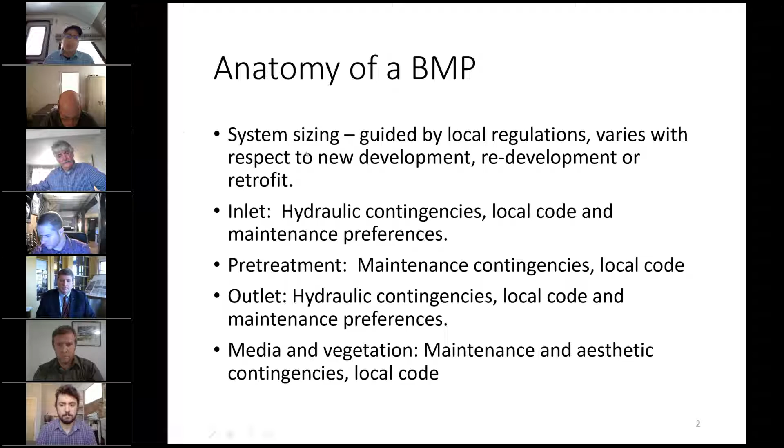So the in-between varies, and it's often flexible based on, I would say, either regulatory guidance or preferences of the owner operator, the long-term owner operator. And this is one of those areas that we hope continues to grow, because I think traditionally the preferences, particularly the maintenance preferences of the long-term owner operator, for the most part, have not been incorporated into a lot of design. And hopefully that's changing as we embrace maintenance and the need for maintenance.

So early on, every system that was designed had an operation and maintenance plan. Typically, it was 30 or more pages. And my guess is that no one or very few people outside of the primary authors of that document ever read it or interacted with it. And so that has been changing over time. What you have here is two examples of some of our checklists. One of our early checklists, we reduced those 30 pages to 1 page and 4 primary items.

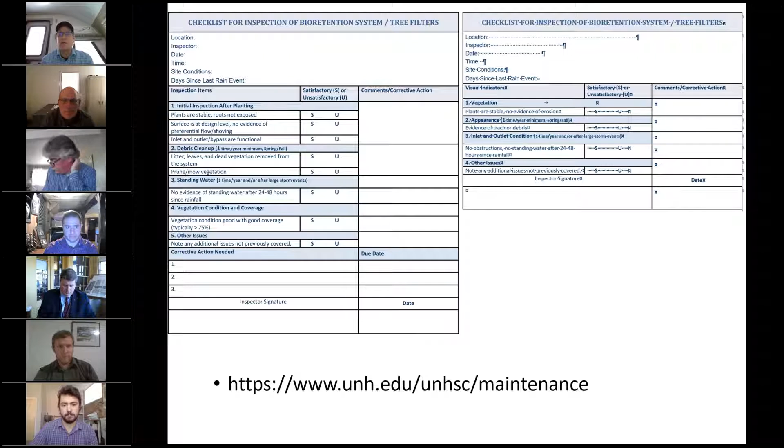And through work that we did with Warwick, we tried to reduce that even further, so that you can see on the right. And really, we're looking at visual indicators for the most part. Can water get in? Can water get out? Is there any evidence in the in-between that there's some type of problem? And so for those who routinely do maintenance, this level of oversight can be minimal. A trained eye can validate and verify this relatively quickly. And so hopefully that's where we're moving towards over time.

When we look at maintenance, the actual function can be broken down, I guess, into some categories. There hasn't been a ton of literature on green infrastructure maintenance. This is something we presented in a paper that was published in 2013. Unfortunately, that's still very relevant today, at least some of the guidance and the background. So we use these types of categories to portray the types of maintenance that we're anticipating and the prospective cost that might be associated. So something minimal or simple would be mowing the lawn, very routine operations that don't require engineering, all the way up to complicated.

Now, these go into greater detail when we look at the types of maintenance cycles that are out there. And here we're seeing maintenance cycles in a decreasing order of cost, but I think it's also in the order of what we generally see out there. So for the most part, reactive maintenance cycles dominate the industry. And what I mean by a reactive maintenance cycle is, in general, you're ignoring the systems until there's evidence of a problem. And when there's evidence of a problem, it's probably well past the need for maintenance. And this we would categorize as probably the most expensive. So in the short term, it's very cheap. In the long term, it's not as effective for water quality and performance. And if your system fails, then you're engaging more skilled and more engineered approaches to fixing and repairing that.

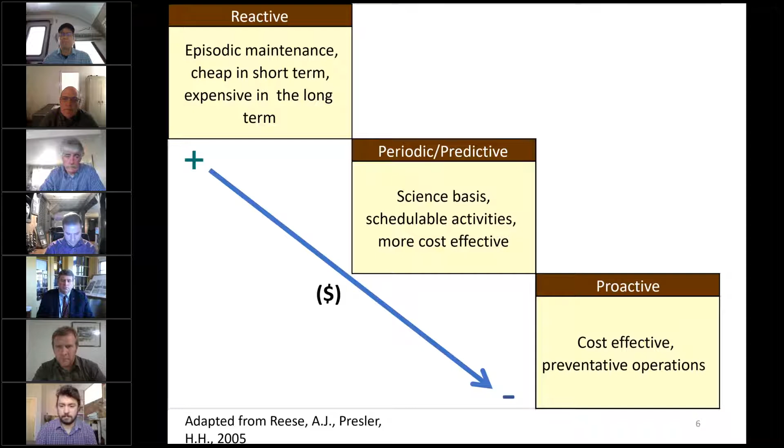Then down to predictive or periodic. Our feeling is that within 3 years of operation, and some of the later speakers hopefully will validate this, within 3 years of most systems, you get a sense of the full range, the universe of approaches that you're going to have to implement or schedule in order to maintain these systems. Then to proactive, and this would be more around structures that might be underground and might not be as visually easy to inspect, but you would be doing some proactive things to ensure that there's no failure, like inspections and maybe sweeping or cleaning. So just some general ideas of what those activities are.

Periodic predictive would be, you're going to have to remove solids, particularly from the pretreatment area. That pretreatment area should be designed so that you have easy and frequent access to it, and you're removing the coarse materials more frequently than maintenance activities within the system itself. Inspection, mowing, or vegetation pruning or removal. Proactive would be like street cleaning, a very proactive source control that can limit the amount of debris available for mobilization into your system.

Erosion and sediment control, routine seeding and revegetation in areas that maybe look like they're struggling.

And when you look at costs, we developed some idea of costs based on the level of complexity. And again, the idea here, if you have cost on the vertical axis, and then these are the various systems on the horizontal axis, from ponds, retention ponds, detention ponds, swales. These are more conventional style systems, to now getting into the green infrastructure.

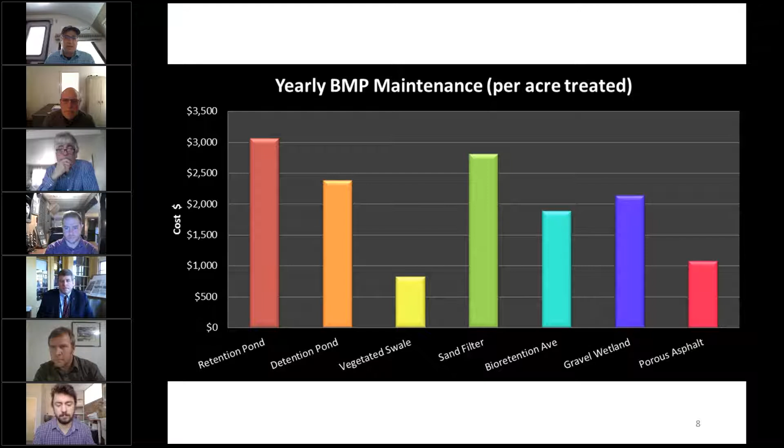What we see is, provided the pill we have to swallow here is that we're doing maintenance. And so if you're not doing maintenance, obviously you can't compare those costs to anything else. But if you are doing maintenance, a lot of times some of these conventional systems are on a scale or in some cases higher in annual cost than green infrastructure. That said, it's likely that the maintenance activities are different. So it's something we have to consider as we move towards green stormwater infrastructure for water quality.

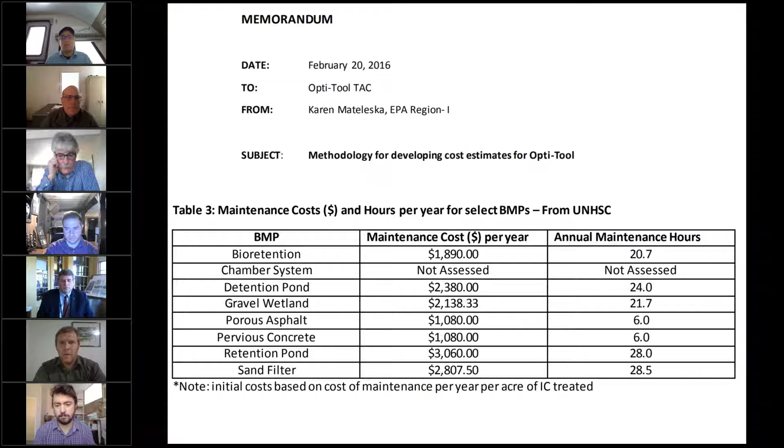Now, I don't generally like cost because they're always subjective. And so what we've done is, in this 2016 memo that EPA Region 1 has released, we actually have predictions of maintenance and annual maintenance expenditure in hours. So there are ways to assess the man hours or person hours that you'll be dedicating to these potential systems over time.

We say, we want the cheapest system. But if we're considering maintenance, then we need to consider that long-term maintenance cycle. And if you're looking at things like ponds that might be relatively cheap from a capital cost, but incur larger annual maintenance expenditures, if in 5.4 years my cumulative maintenance costs now equal my capital costs of the system, then by the anticipated life cycle, I will have paid for the system 4 or 5 times over with respect to the maintenance burden that it initiates.

So it's something to consider, especially as we move into this direction and you're the owner operator and someone's presenting something for your facility that you're going to own and operate for 20 years or more. You want to be cognizant of what these costs and these associated labor hours entail for your organization.

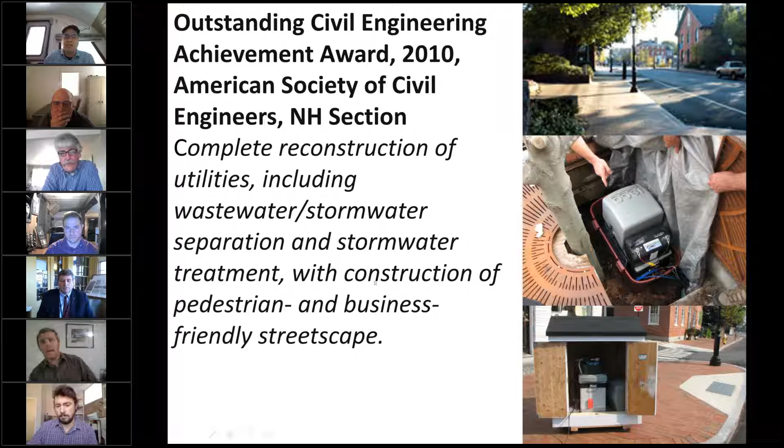And we were invited back 8 years later to do monitoring. We had done some initial monitoring that showed that these biofilters and tree filters that we had installed, at least within the first year, were doing great. It was lining up with all our anticipated performance expectations, and then we left, and 8 years later we were invited back to test it to see how it was performing.

And so what we did is we separated it into 2 sub-watersheds. Our control watershed was untreated, so straight out catch basin, curb, gutter, catch basin, outfall. That was our control, and then our green stormwater design was that award-winning treatment that had 4 or 5 different tree filters, sand filters, bioretention, and the like.

What we see basically is when we compared the green infrastructure, an award-winning site, to the unmanaged site, what we see is really the legacy of maintenance, or more in particular, the legacy of lack of maintenance. And so we see within 8 years, no statistical difference in the water quality from the drainage area.

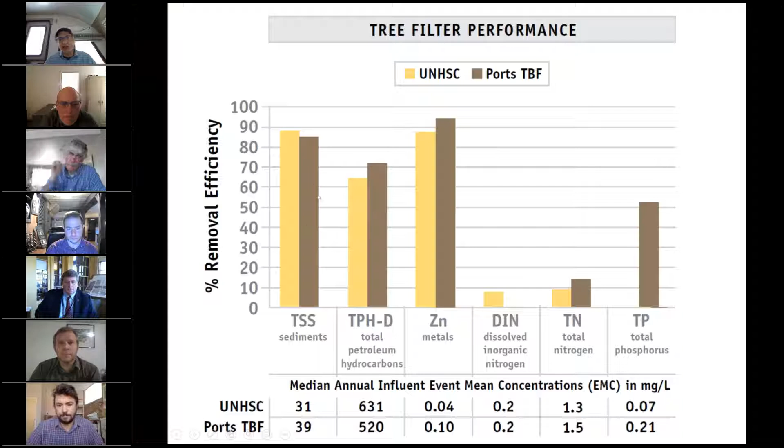And so that was really compelling, and I really think it underscores the need and, quite honestly, the importance of maintenance, even more so over type of system. So if you can ensure that you're going to maintain that system, I think that takes priority over the style of system that you're installing.

So was this predictable? I would say at this point, yes, because we never discussed this with the long-term owner operators. We never asked them, one, if this is something that they would envision maintaining, or that they even had tools to maintain. And it turns out they had neither. And so hopefully, like I said in the beginning, this is something that is starting to turn around. We're involving the long-term owners and operators in the design process, such that we can ensure the sustainability of our investments.

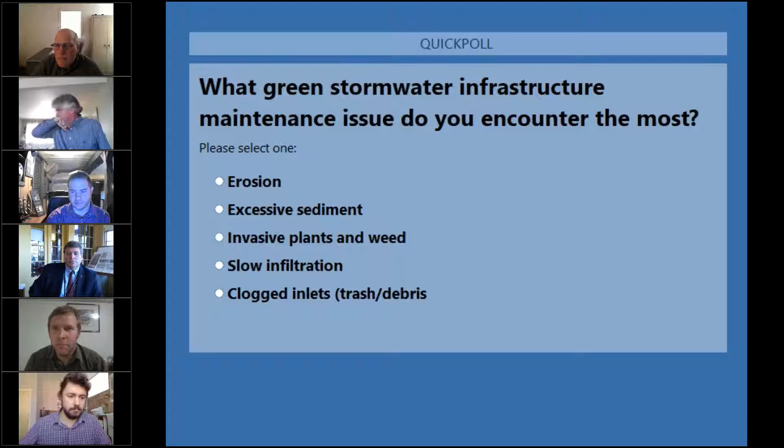Okay, yeah, so it looks like same as what I think we encounter a lot is clogged inlets, weeds, sediment. They're probably all an issue, but yeah, these polls are important to help us develop content for future trainings. So I do have a couple of questions here in the chat.

This first one says, Jamie, do you have another similar study that compares a system that is well maintained versus a system that is not? I think you're on mute, Jamie. Unfortunately, I don't. I mean, we have studies on maintenance.

This particular study that I just showed you was the first time we ever really looked at the legacy of a maintenance program. And, you know, I would love to do more comparative assessments like that, because lost in here are the exact technical details of how these systems fail and when they fail. And so those are really legitimate questions that unfortunately we can't answer.

Okay. Got one more here. It says, is there any sort of real-time monitoring work being done, some sort of an alert system that would be accessible via the web to find out if systems were functioning properly? I'm assuming so that would trigger you to send out maintenance people.

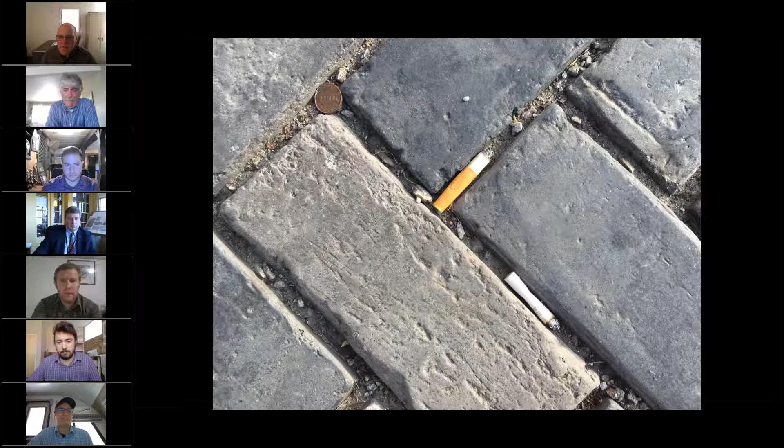So what has turned out to be an absolute bane of our existence is cigarettes. No one saw this going in. It's a little bit like they took a cigarette out and said, gee, what space should I have these apart? Well, let's just use this as a spacing. And so just about every single complaint we've got about this green infrastructure on Broadway has to do with the massive numbers of cigarettes. And those suckers really do not want to come out. We've tried just about everything.

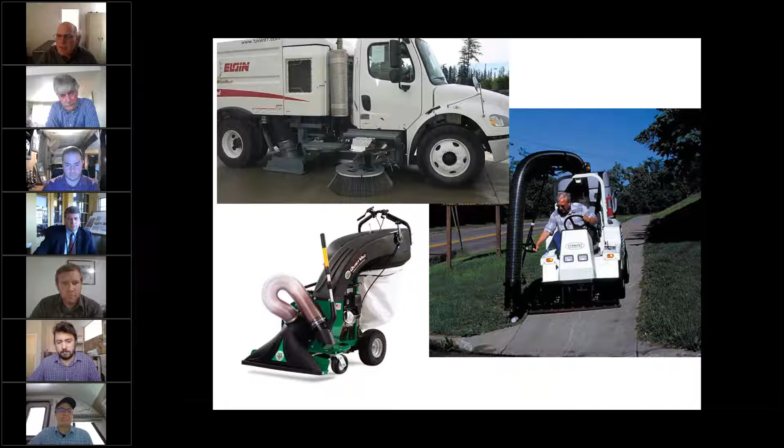Steve Reese is going to talk in more detail about the maintenance of permeable pavers a little later on, but just to say it's frustrating. The picture that's missing is the flamethrower I wanted to try.

The next step is these permeable pavers lead into these tree wells, and these systems also, like the permeable pavers, have worked out incredibly well. But what wasn't anticipated, all of this decorative Boston Garden post and chain was not part of the original design. Within half an hour of this structure being open to the public, I had calls from the city manager's and mayor's office about the potential risk of people falling into this. There was absolutely nothing preventing pedestrians from falling into these, in a sense, bear traps. So I was out there within a half an hour with 2x4s, making a makeshift enclosure.

So it's functioned in many ways quite well. There is a continuation of having to keep litter and trash out of this system. But when we have a heavy rainfall, too heavy to be absorbed by the pavers, the overflow comes in here. So you'll notice that there's no green in this, and that's because what wasn't anticipated in the design is the infiltration is so fast that everything that was planted in there literally floated up and completely came out. And after about 4 or 5 times of trying to replant these floated-up plugs, we gave up.

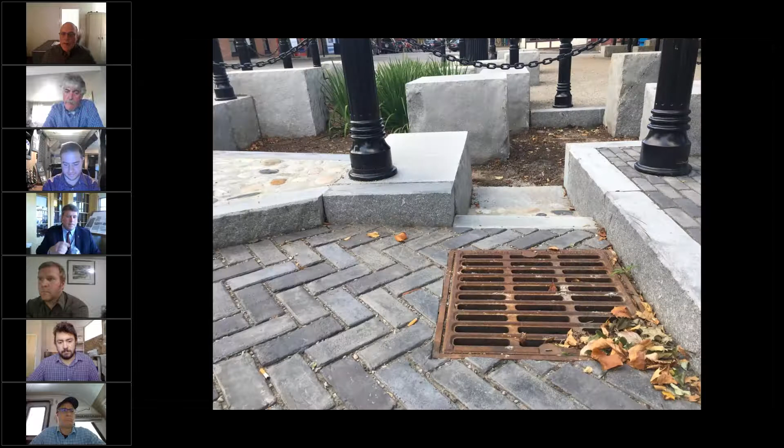But one of the things I would really recommend when you're doing green infrastructure in an urban area is you better do your site investigation up front. You better find out what's underground, because this catch basin inlet was not supposed to be in this location. It was supposed to be about 2 feet to the left, right in this area here. And the intent was once the rain garden fills up, any excessive water that isn't drained would come back and be caught up by that catch basin.

Unfortunately, I think you could grow cactus in this catch basin. We're going to have to come up with a solution, because after about a year, that's all of the sedimentation we've had, because the majority of the water is caught by that drain. We're going to be experimenting with a mat or something else to try to get more water into this system.

So we also have some other similar system just next door. This one is totally only fed by rain and a little bit of sidewalk runoff. So again, you should look up when you're designing these systems, because this very expensive system falls directly under the rain shadow of these huge trees. So they won't last forever, but certainly these are the type of considerations when you're trying to put green infrastructure into a dense urban area.

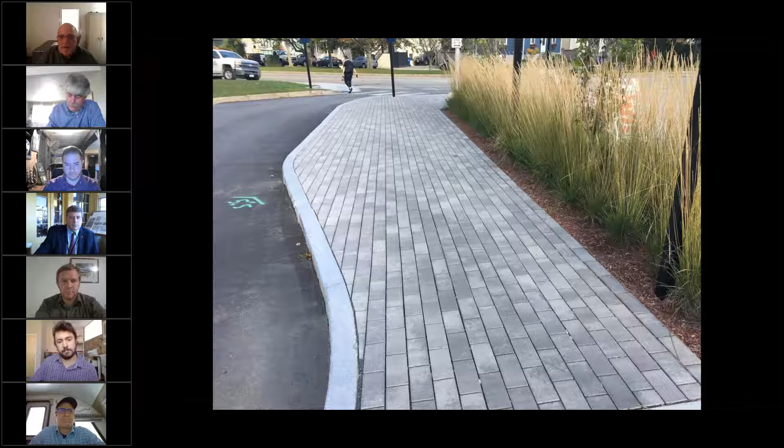So I think it's a success story. When our visitor center bus parking area was being redesigned, we had a demand from the public to go back to the drawing board and include green infrastructure. So the design for our transportation and visitor center completely changed. And we have an extensive system of green infrastructure. And we also have pavers there. I think in this case, they're a little bit closer together, but still my nemesis, cigarette butts.

But this green infrastructure system is really a great place to study, because it involves such a range of different systems. In this lower corner, you can see this sort of black cover. That's actually the inlet. And this system is completely fed by piping underground from the adjacent structure's rain gutters. As far as a point of failure, ensuring that those gutters and drains are properly maintained is going to be essential, and is certainly going to be one of those challenges.

A much simpler design, one that I like, is to simply have a break in the curb, so that automatically drains into it. What I would counsel is that engineers love riprap, and they love nice big stone that it's impossible to run lawnmowers over. Oftentimes this riprap clogs up very easily, blocking infiltration, and in some cases it actually provides a perfect place for invasive plants to get established.

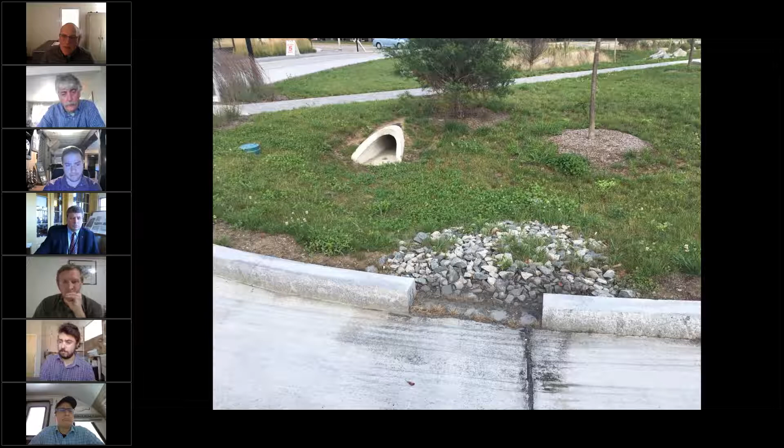So we've been experimenting with smaller and smaller stone. We found about 2-inch stone, about the size they would use for railroad grading, lies flat, and leaves flow over it. It handles all of the erosion, but doesn't create material that can catch leaves or harbor invasive plants. A great innovative design is simply to have a grate over the sidewalk.

And this area, I guess Jamie would call a pre-treatment area. Jamie was kind enough to do a training for myself and all of my staff on how to maintain this system, and we did it actually before it was done. And so we discovered that this whole pre-treatment area was basically a standing pond. After a little investigation, it turned out that for the stone between the treatment area and the infiltration area, they decided to put black plastic under the stone. So it was an easy fix, and it worked out really well to have Jamie there. Although the contractor wasn't loved, the checklist was pretty accurate for the project.

And if you look just to the side of the photo, this is really my favorite way to infiltrate. Basically the whole back of the bus parking lot is simply sloped in such a way with no curb. It just runs directly off the sidewalk into this long pre-treatment area, and then flows into the infiltration area, which you can see is vegetated.

So I want to talk a little bit about vegetation. Jake Gorky is going to talk a lot about planted versus seeded. This system, as designed, was incredibly elaborate. It called for 10,000 perennial plugs. You can see a little line of gravel and stones that run throughout this. And this was all supposed to be a perennial garden. I pointed out to the visitor center that was going to maintain this system, how are they going to weed 10,000 plugs? And I was able to convince them to change it to a seeded area.

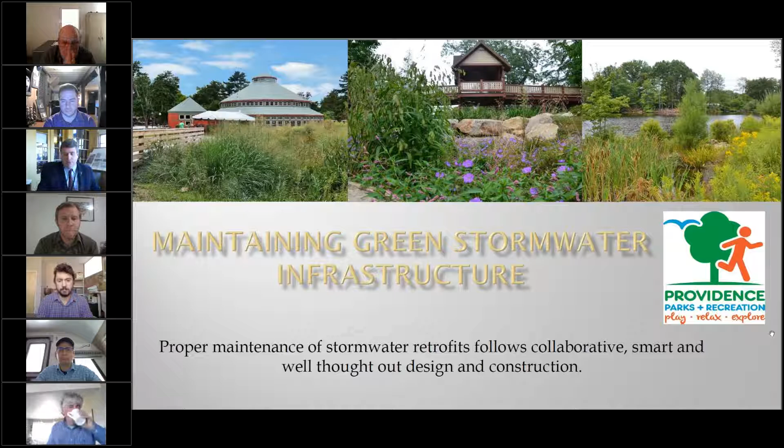And so through a consent agreement with Rhode Island DEM, we embarked on building 40 plus stormwater BMPs in our park, and then tried to guide the design based on what our maintenance personnel and the engineers were telling us. So we own everything from the design to construction to maintenance of these facilities. So we have it all. And what we found is that proper stormwater retrofits follow collaborative, smart, and well thought out design and construction. And that leads to easy maintenance. So maintenance is a function, and aesthetics are connected to that function.

You need to know your capabilities of your maintenance staff, the equipment that they have, a bunch of different things that lead to their ability and success in maintaining these things. So like Jamie talked about, there's 4 main elements to any BMP. It's an inlet, a pretreatment or sediment removal, the weirs, and then the contaminant removal.

And we are, like Jamie, changing our nomenclature. Inlet doesn't really tell what it is. So we're going to call it a collector or something like that. And we're working on that now. And we're working with many of our consultants still.

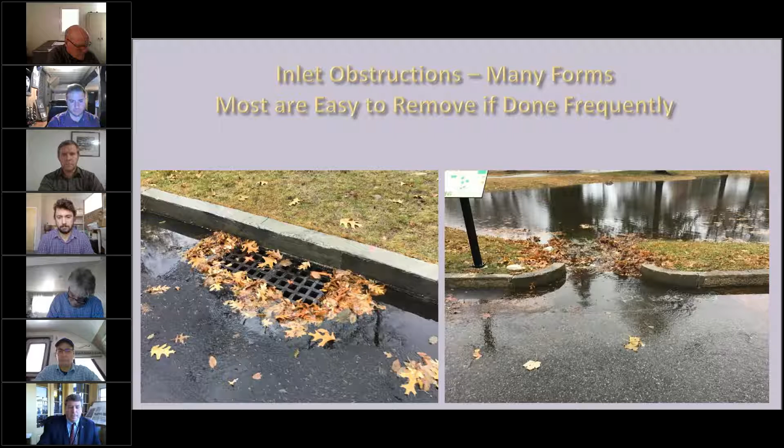And when you deal with your engineers and you're getting into designing these things, there's 2 schools of thought on that. One, put all the water through your BMP and let the overflow in the BMP take what you can't treat out. And then those that say don't put enough water to inundate that structure, let the street serve as the overflow. So we've been dealing quite a bit with that, and we have different versions of it.

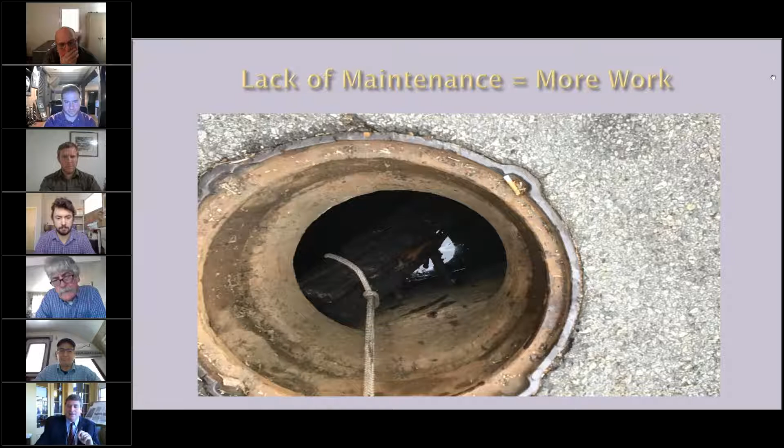Lack of maintenance always leads to more work. So this, believe it or not, is a 24-inch manhole in an AutoZone parking lot here in Providence. And what you're looking at is a 10 by 10 timber that's about 10 feet long. So we asked our forestry department to come over and help us get the railroad tie out of the drain manhole, because we didn't know how to take a 10-foot long post and get it out of a 24-inch round hole. And this is about 50 feet down from the inlet from Mashapaug Pond. So as you see, they have a chainsaw on the end of a pole. We cut it, we put a rope on it, and that's what came out.

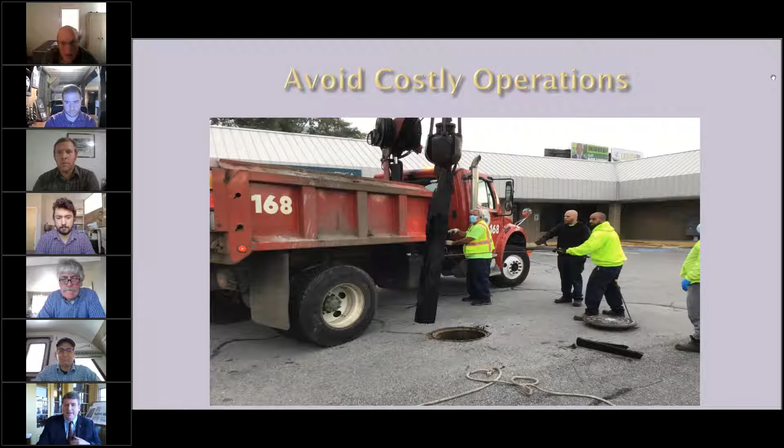This was a costly operation. DPW was involved with their claw truck. My crews, it took us about 3 hours to do this. That is certainly easily avoidable by maintaining the trash grate on the inlet coming out of Mashapaug Pond.

And here we go. So the pre-treatment or the sediment removal. There is a vulgarity in the Providence Parks Department, and it is river rock. Early on, actually, I've been with the Parks Department for 6 years. Before that, I was a contractor for 30 years.

So if you can imagine what it takes to remove the sediment from this 18 inches of river rock, it's a very successful design in removing sediment. It removes it tremendously. But you don't see it until a foot or more of sediment has built up in it. So I brought my crews out here. They were new to me. I was new to them.

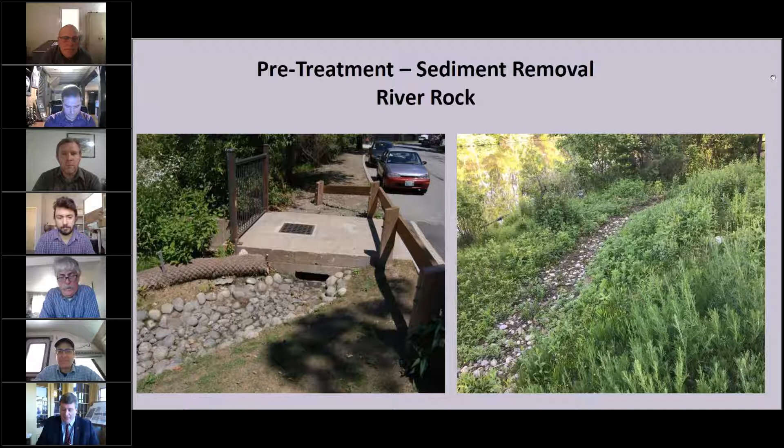So we leave this in place as a training tool only, but we will never use river rock in this sense ever again. If it's a small section right off a scupper off a roadway, that's easy to maintain. This is about 300 feet long, and it is a bear for us to maintain. So river rock is not something we use.

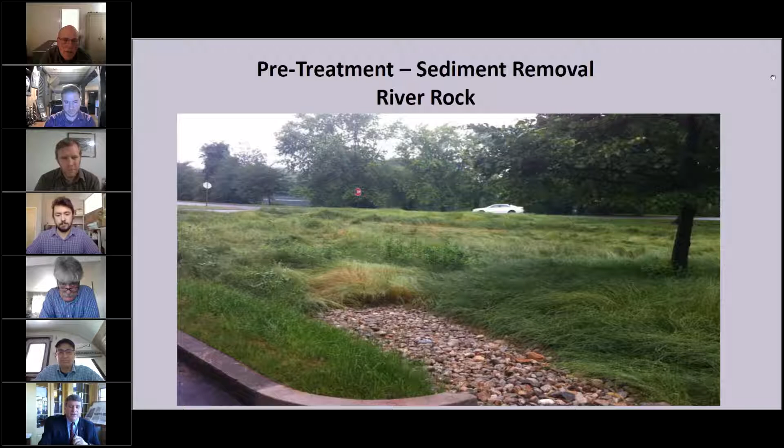But again, when you look at it, it's beautiful. So this is one of those areas where we will use it. It's very small. We can take care of it. It's in a highly visible area of the park. This is a sand filter, and this is the inlet. So very effective in sediment removal, very difficult to maintain.

And for lack of a better term, my crews utilize a drive-by sediment removal technique. They drive by, do not need to leave the seat of their truck to see if sediment has started to accumulate in these areas. So I think Steve Ritchie's going to talk later in the program about maintaining permeable pavers. I would suggest that what Steve's going to talk to you about are much larger permeable paver areas that have high vehicular and pedestrian traffic.

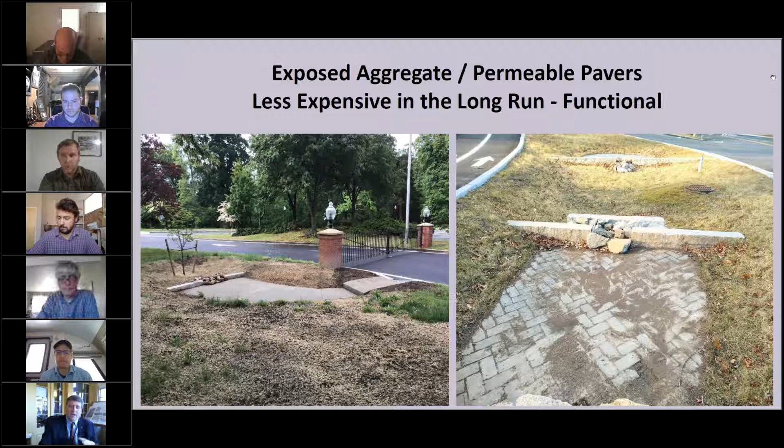And as Jamie mentioned before, every situation is different. So I'm not going to say to you that you're going to realize those same dollar amounts, but that's what we did in one area. And it's based on how much sediment goes there, what's contaminating it. So it's difficult. The bottom line is, if these things are functioning, we're getting clean water.

The next part, as we move past the sediment removal, is the weir. So we want your water that is laden with sediment to come in and then stop. That motion allows the sediment to drop out. Traditionally, you've seen pressure treated weirs, you've seen granite weirs, you've seen granite curbs, which we use all the time. But we kind of thought to ourselves, where our aesthetics are important to us here in this small 435 acre park, well, what about boulders? What about just putting a line of mortared boulders in?

So we've looked at a bunch of different types of materials we can use. On the left-hand side, it's the boulders. On the right-hand side, we used a gabion basket. So I know Groundwork RI uses a subsurface gabion basket. We use this gabion basket above the surface at the base of a permeable paver, as you can see it. But you can see what happened for a dramatic storm where we had some erosion. That gabion basket got the sediment built up, and now we had to have a difficult cleaning of that thing. So we're learning these lessons. We're hoping to pass these lessons on to everybody else. But you have a lot of options.

These are weirs here in Roger Williams Park. We incorporated art into some of them, so it's not just a granite curb. We also made a natural looking stream with one of our weirs. We used a pump out of a place called the Japanese Garden. We pumped the water up into a subsurface drainage system, and then we let it come down and make its way back to the pond through a granite weir and some boulder rocks. So it's very beautiful, high area for photography. Brides will go out there and see it. This is an early on picture. It's fully vegetated now. But don't be afraid to incorporate a bunch of other things into stormwater. I mean, art is a great thing to add to stormwater.

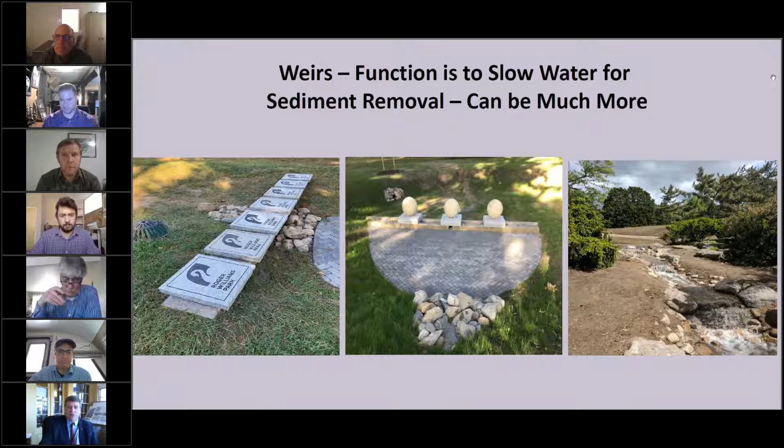So maintenance challenges that we've faced. Did you lose me there for a minute? Yeah, your audio is cutting out just a little bit. Okay, you got me back again, Ryan? Yep, we got you.

Okay, maintenance challenges. Funding is always a problem for municipalities. We face that too. So we had to build 42 stormwater sites in Roger Williams Park to address our MS4 permit. So how are we going to maintain those? We felt that training our staff was the most economical and the only way that we could do it successfully, and that's what we did. But it's a huge task. We understand that taking catch basins offline is expensive, but it's important. We need clean water. So you can either do it in staff, or you can outsource it. Outsource is a check that needs to be written. That's oftentimes more difficult than labor hours spent.

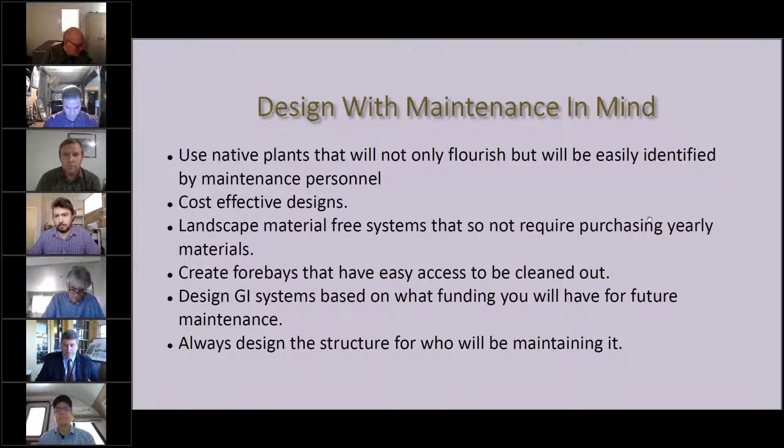Design for the funding you have. So, you know, the size of these structures is directly related to the cost. So if you can't treat all the water, treat as much as you can. Whether it's geography that's a problem or cost that's a problem, do what you can to get the biggest benefit. And always design the structure for who'll be maintaining it.

It's just extremely difficult. So the sediment removal, one of the easiest things is a large basin. So if you can capture it in an inlet out in the street, that's one way to do it. Watch the slopes. You need to have access to all areas, both sides of these things, because that's how the workers are going to remove it. In water access, now we've locked ourselves away from where some of this material ends up in the ponds because it's not 100% removing all the sediment. We can't get to it.

Know the capabilities of your equipment. There's specialized equipment to do this. It's expensive. So design for your staff and your machinery. Also the experience of your crews. We train all the time. We're always training our crews. And the experience of the crews and how they run their equipment is a direct result of the training that we've done.

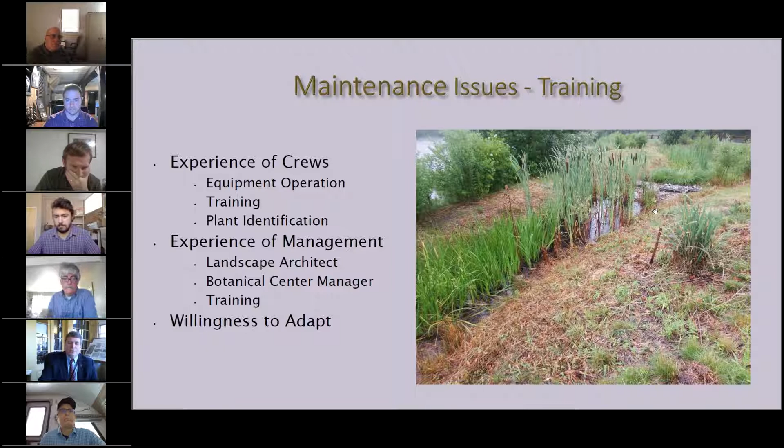And most difficult for a lot of our crew members is the plant ID. You know, they're not landscape architects, they're not horticulturalists, so it can be difficult if you didn't study that. So we use the best tools we can to make it easy for them. But we do have landscape architects on the payroll and a botanical center manager, and we ask them to do the training. And the crews have to be willing to adapt to this new thing. And luckily, we have a crew that's very willing to adapt.

And again, it always comes back to the money. So these types of elements are more expensive than your standard catch basin. So a buy-in from the administration of your town or whoever it is leads to cleaner water. It's labor intensive, it takes more staff, you need a commitment. And the Clean Water Act is in place here in Rhode Island, and we need to start abiding by it. And that's what most of this work has been about.

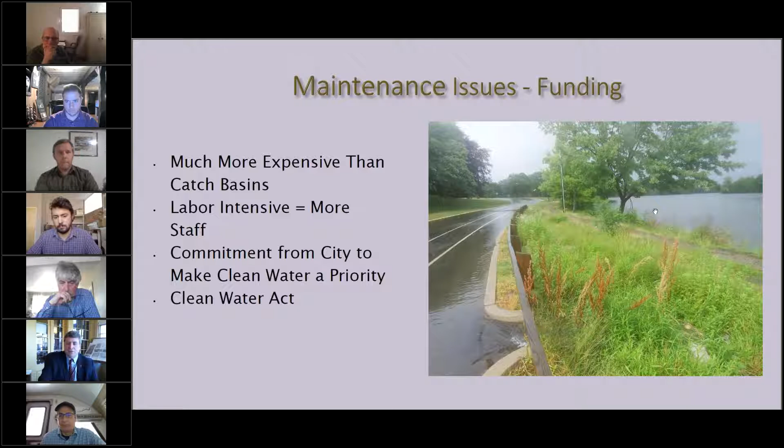So how do we do it? We use pictures rather than words. So this is one of our sites. This is what our crew looks at. And if there's time at the end of this presentation, we'll talk about a system that we have called Green Cities and Survey123 that allows our crews to do everything with an iPad. There is no more paperwork for us, and those reports get sent to myself and other directors.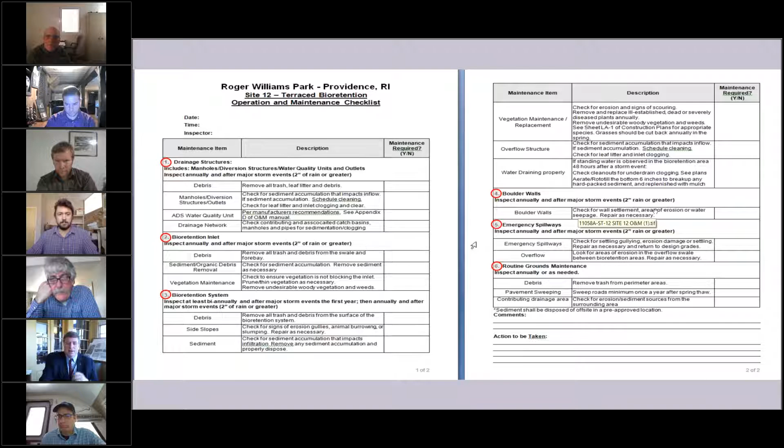So this just identifies what these different things are in these areas. And we did a search, like you had to find out where the weir was, you had to show us where the pre-treatment was, and it just tells you the basic maintenance that's required and the frequency of that maintenance. And they used to fill these out on paper, but now we all do this on the iPad.

So we talked about plants. So when we set out with the Stormwater Center to train people on what they should take out, we use this list.

What plants should not be in your stormwater center? Well, the palette of plants that shouldn't be there is huge. And these guys aren't going to learn everything they need to learn about that. So we moved away from what shouldn't be in, and we went to what could be in. What are beneficial native plants that you don't want to pull out because they're in there? That palette is huge too. So we reverted to what was planted there. We started with that, and now, because of the willingness of our crews, they've learned more about what can be in there.

The mistake that we made in our first training, which we've rectified, is we went out in early April. These are the pictures we had: everything was in bloom. Nothing was in bloom early April. So our guys turned to us and said, hey, we're done. None of these plants are here. So we've learned a lot of lessons.

For non-municipal private owners, if you're installing these things, do you have funding down the line to maintain them? You've got to have that in place before you build them, because otherwise they're not going to work. We've utilized volunteers here in the Parks Department to try and curb those costs. Are the property owners willing to do it themselves? Do they have to hire someone out?

We need to gain support from the community and the public to make sure this is a problem that everyone wants to address. Here in the park, we have the golf course mentality for a lot of our attendees. If the grass isn't cut, they think we're not doing our job. They think it's unkempt. And Scott mentioned it too. We have wildflowers that are adjacent to benches, and people call us and tell us, you got to cut that back because I'm sitting on the bench and this thing's hitting me in the back of the neck. They don't understand that it's wetlands.

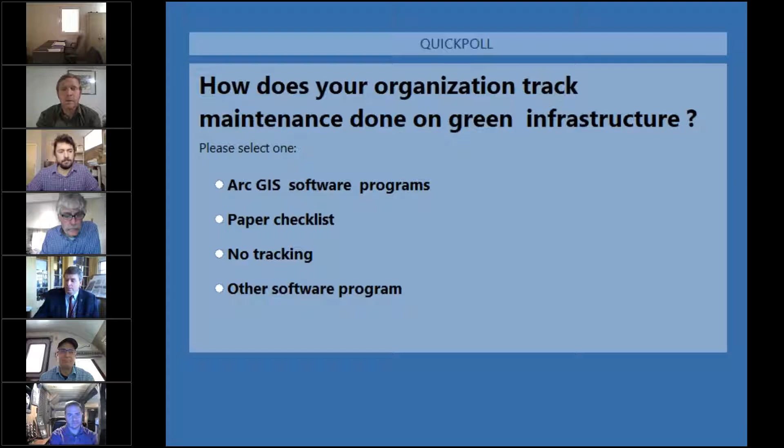Okay. All right, so it does look like not a lot of people are doing tracking. So hopefully we have time at the end, or even if you're able to stay a little later, Brian's gonna go over their tracking system. So stick around at the end of the presentation. So I'm going to get to some questions here.

One question is, at what point does it make sense to consider maintenance in-house versus contracting it out? So I didn't feel I had a choice. The other problem here in Rhode Island is there are no contractors that I'm aware of that are doing this specifically. You have that set of contractors that's willing to suck out catch basins, and they have that $200,000 piece of equipment. And then you have landscapers that may be more versed in pulling invasives and using that type of removal. But there's no contractors that are doing both.

And I think Rhode Island DOT and a lot of municipalities are struggling with a way to outsource that, because you don't have anybody right now that's doing that on a daily basis, particularly in like a highway scenario where a landscaping type company may not be used to working on a highway. They're not going to go out and do that type of work. So it's organizations like Groundwork RI and WRWC that are providing that work, and hopefully can expand their footprint and do a lot more than that out in the state. That's the situation here in Rhode Island.

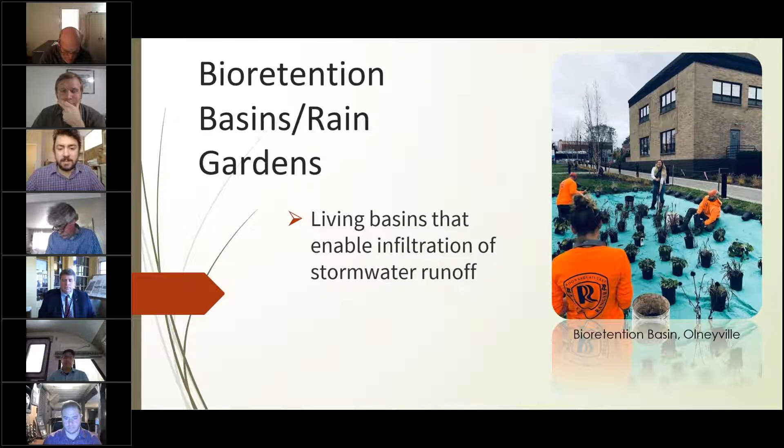Bioretention basin is basically a system that is used to collect and allow for the infiltration of rainwater off of parking lots, roadways, and areas that see large amounts of sheet flow. They consist of a soil media that is roughly 1 to 3 feet deep, depending on the size of your system. They tend to be one of the more effective ways at removing contaminants as well, based on the amount of biomass that you can fit in there and the amount of soil media.

So this bioretention basin here that you see is at Citizens Bank in Olneyville. We actually installed 2 of them, and they're kind of a great little example of how we may want to address seeded versus planted systems, what may be the better option for any given area. Sorry, here we go. First, I'm just gonna talk about the maintenance procedures and then we'll get into that.

So we wanna make sure that every time we go by these sites that we're looking for trash or any sort of debris that may have accumulated within the system itself. We wanna make sure that the system bypass or the overflow pipe is open and water can actually flow out of the system if it does reach that maximum pooling height.

Anything in there that might clog the system, again, we just want to make sure we get out of there. We want to monitor for any erosion issues that might occur within the system, so channeling, tunneling, and this especially goes for newly installed systems, because the plants have not necessarily had the adequate amount of time to establish yet or germinate. So those can be repaired simply by either adding river rock to the problem area, or if we want to add seeds to any of those erosion problem areas, we can go ahead and do that and then overlay it with an erosion mat or erosion fiber mat that will help further protect it.

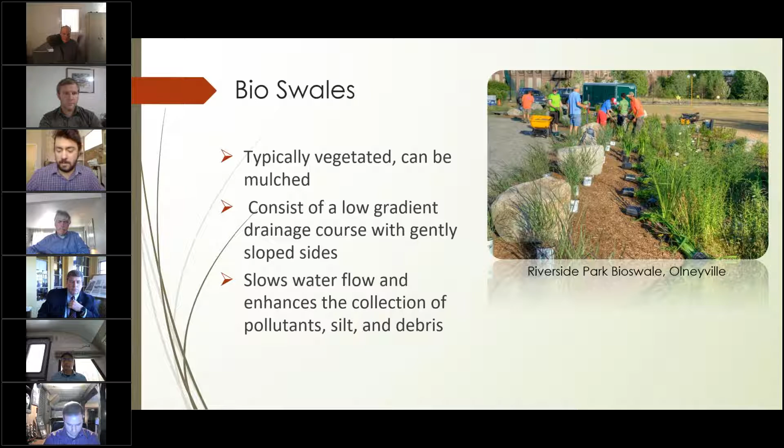When you have open areas that are mulched, you have to be able to have a maintenance staff that can tackle invasive problems. Any open soil or any open mulched areas that we have, we do tend to have problems with plants like mugwort, Japanese knotweed, among others, that we have to consistently be fighting with.

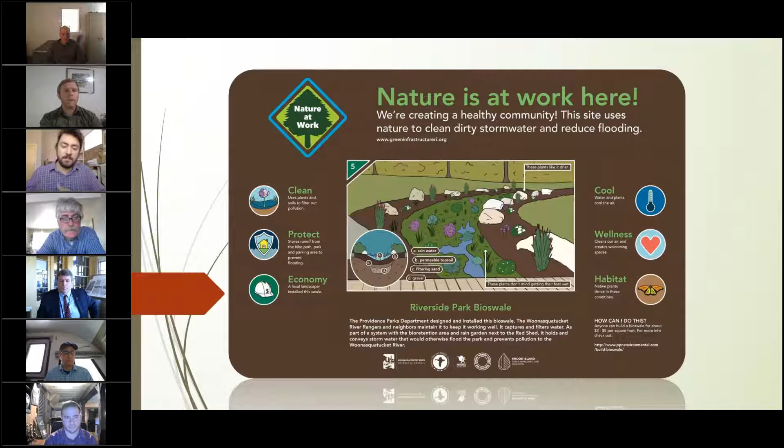Here's just a little sign that we like to put up. We have a number of these signs of various configurations for each one of our stormwater management systems that kind of tells the public exactly what's going on. We have them written in English and Spanish. We try to make sure that everyone knows exactly what these systems are doing, so that they're actually cared for well by the public and people appreciate what we do.

Again, this is bioswale maintenance, regular removal of trash or inorganic matter. That's something that you want to take care of. Basically make sure that your system is operating at maximum efficiency, prevent any blockage in the system. Same thing with weeding. Again, if you have to water your plants to make sure that they're doing okay during periods of drought, that's something to make sure you do as well. If you do have areas that build up with sediment or you have erosion problems, those are generally relatively easy fixes in a bioswale that has a low flow rate.

We do a lot with just regular old garden tools, line trimmers, and hand tools when we're doing our maintenance. So if the system does back up, again, you're going to excavate with just basically flat face shovels or line trimmers.

Tree box filters, these are really cool. We have 4 of these that we just installed last year on Manton Avenue in Olneyville in Providence. They are a system that basically incorporates a tree that helps to absorb some of that stormwater, as well as a soil media that's contained within a box that absorbs a lot of the stormwater as well, removal of contaminants.

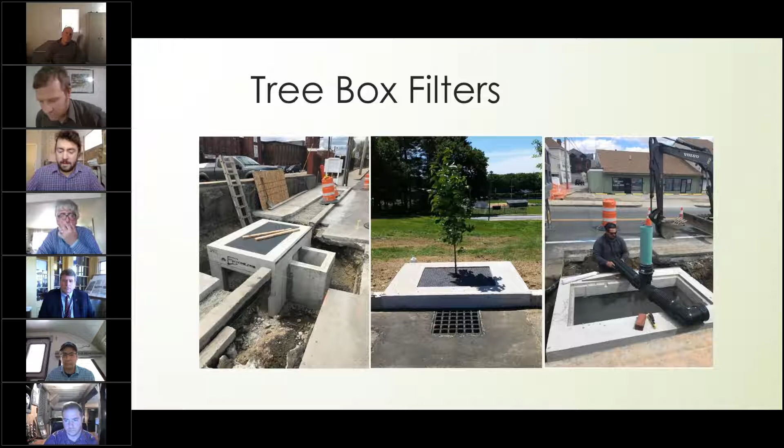One of the primary things that we did not foresee when these went in was the amount of sediment that was going to accumulate around the base of these trees. And as we know, that could effectively starve the root system of those trees of oxygen. So we actually have to go in on a bi-monthly basis to make sure that these trees are getting the amount of oxygen that they need in order to survive and keep going. And that's about a 2-inch layer every 2 months based on the area. And I'll move on here.

Scuppers, I'm just going to echo a little bit about what Scott had said. If we drive by these things and we see a lot of sediment in there, it can be a pain in the butt to remove all of that river rock out of there. It's not something that we have to do very often, but if we do see any scouring around the edge of the scupper or any blowout, then that is something that we have to address. Thankfully, we haven't really had to do that too many times so far. It can be backbreaking work.

And again, here's scupper maintenance. You want to make sure that you're removing all of the foreign material and trash that gets in there that may cause drainage problems. Invasive weeds that may clog up the system, you want to make sure that those get out of there too. We don't want soil to build up because the main function of a scupper is to break up the water flow and to allow for a drainage course.

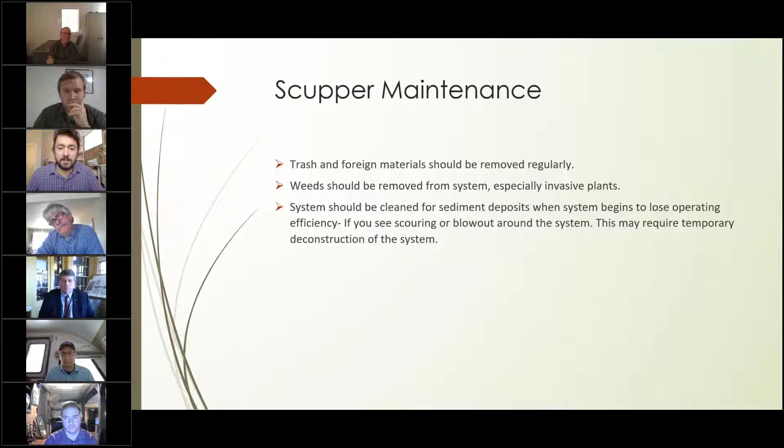Basically what it is is a hard plastic grid that you put down and fill in with a soil media. You don't want it to extend above the edge of the plastic grid because as vehicle tires roll over it, you want that grass to be able to be protected. These should be accompanied by retention basins or swales as well, just to make sure that any sheet flow that does come off is collected.

So you're going to have 2 types of problems when you're dealing with standing water in your detention basins or bioswales. One of them could be an infiltration problem that has to do with your soil media. The first thing that I would check for is to make sure that you don't have excessive sediment buildup on top. If you go through the process of removing sediment from the top layer, whether it be 2 inches or a foot, and it's not draining properly, you can try seeding the system to see if you can get more water uptake that way. And in the event that it's still not working, before you go off and excavate the whole system, you should definitely check to make sure that you don't have a drainage problem, which you can easily find out simply by accessing.

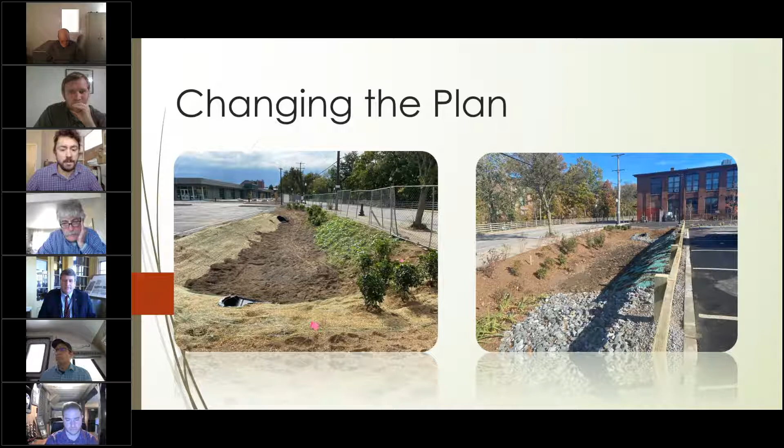Benefits of seeding: you're going to have a much better vegetation establishment initially with seeds than you are with a planted soil. That's beneficial for a couple of reasons, because you're going to have a lot less open soil space. These bioretention basins that we've seen aren't really wet all the time. A lot of the time that we're looking at them, maybe between July, August, September, October, there's a lot of very, very dry soil in those months. So what that means is if we do have a more intense storm, erosion can become a big problem.

So when we seed in the springtime and we get really, really fast germination of these seeds and everything blows up really fast due to springtime runoff and rains, it actually reinforces that soil much, much better. And again, when we have much tighter planted or seeded areas, they're a lot more resistant to invasive species. We have not really seen any invasive infiltration within these systems in Olneyville as of yet.

When we go around to maintain them, the only thing that we're really maintaining is the perimeter of these seeded systems. So in terms of the efficiency of maintenance, it's just a lot more efficient. We're not running around to every single plant that we have planted, collecting trash out of them either. Again, it's really just a perimeter thing. Go around with a few trash pickers, pick up the trash, line trim around the edges if you have to clean up the edge.

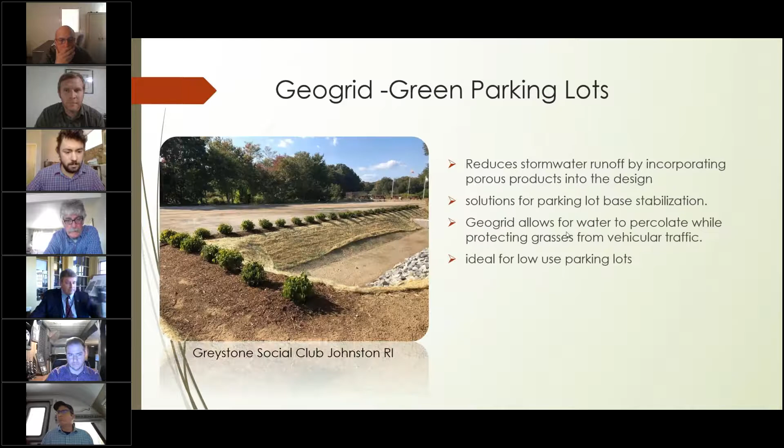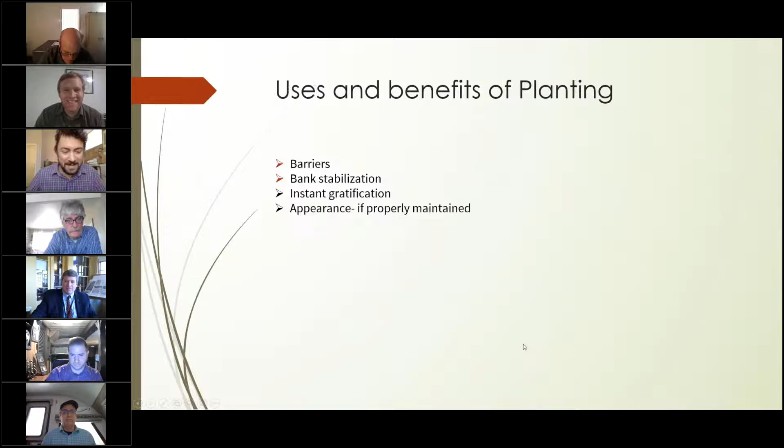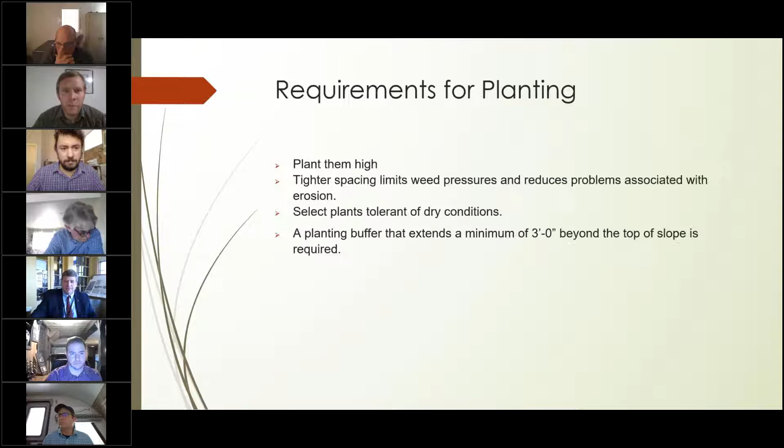My name is Steve Ricci. I'm from Groundwork Rhode Island, and we install permeable pavement as well as maintain it. We actually do it for all BMPs and green infrastructure. As Brian said earlier, we actually do a lot of these types of maintenance that we've all been discussing all day. But we are one of the companies that is not able to get that $200,000 truck and kind of move on to that next level. So definitely a lot of struggles in that aspect.

They're actually a 1/2 inch thicker, so they have a 1/2 inch more height to create more depth and space in between each joint. But underneath the concrete pavers, you're going to have a joint material, which is usually rice stone, an open graded bedding course, which can be anything from a stone dust to a rice stone, depending on what type of subsurface you're dealing with. Underneath that, you're going to have another graded area that's packed enough to actually hold and withstand traffic, so you don't get any dips and bubbles, and we get the frost heave issue out of the way, so the pavement actually stays level.

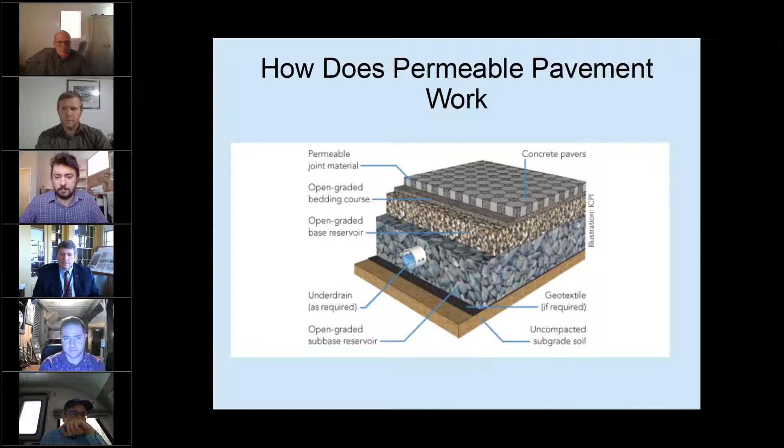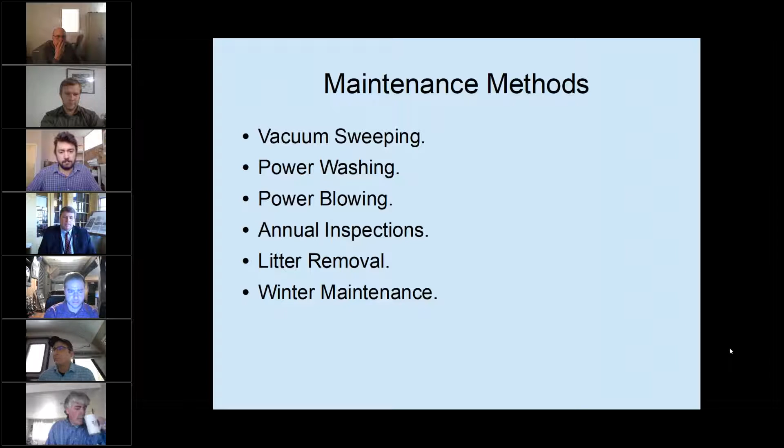And these are for larger areas. If you're doing something small, like some of the examples Brian showed in the park, you're looking at a $300 attachment that goes onto a weed whacker, 2 guys, they brush out the rice stone, pop it back in. You don't need these expensive hand equipments that are into a suction truck.

But when you're dealing with sidewalks and pavement strips and parking lots, you're going to need something larger in order to get that top layer out, and you're going to need something more powerful too for some of the things that are jammed in, as Scott mentioned earlier, which I'll get to, in cigarette butts being a very large issue right now, and it's being battled in a few different ways.

But most pavement right now requires to be completed between 3 and 4 times per year, but this is all depending on the scenario you're in. If you're seeing a lot of traffic, it could be more. If you have a really bad winter, or some municipalities, depending on what they use in the winter, will actually be out there every 2 weeks or even after a storm. We'll get into winter and how we're dealing with that. But so the 3 to 4 times per year, that's kind of a seasonal thing. That's kind of where the manufacturer will tell you should be, but other places do it more.

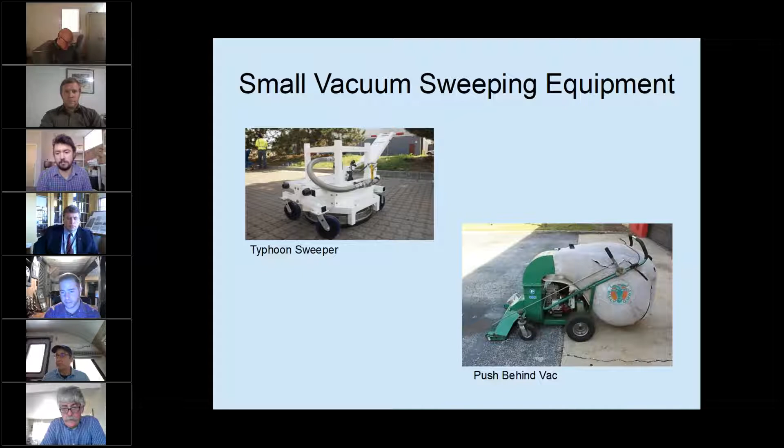When you have this push behind vac, it's one guy, he goes out, he vacuums any of the debris, small sediment, fine dusts, cigarette butts, that stuff. Hopefully, if it's powerful enough to suck out the cigarette butts, they'll get wrapped up into the machine, they'll get sucked up, they'll be gone. You're talking about one guy, 1 hour. If the BMPs are linked close together, say a park or something, you're talking about multiple in an hour. So obviously the smaller ones are a lot easier to maintain.

Power washing. Some of these areas require power washing. And the way these power washing units are set up is they're enough to basically power wash the sediment out, and then usually get sucked up after, or it's pushed into one general area where then it'll get sucked up or power washed right off the permeable pavement. The power washing, the way it's set up is it's usually made to blow out 1/3 of the media or rice stone that is in the joints.

All these things, whether it's a vacuum, power washing, blowers, they're usually made to take out 33%, which is that top layer, which usually holds the sediment. It's usually made to blow it all out or brush it out or power wash it out so that you can get the system working again and taking on the water. And usually after this, a couple bags or a simple quick yard of rice stone will be used to actually go right back into the joints. So that's also part of the maintenance as well.

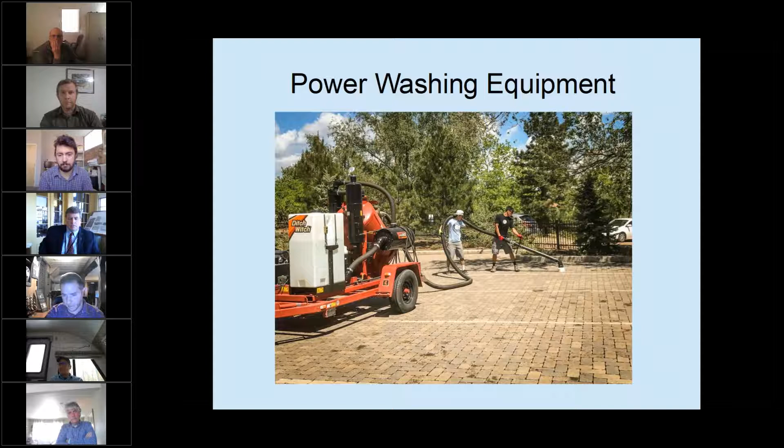During the fall, I've seen some contractors and maintenance guys only do one fall cleanup at the end of the year. But what happens is if you get some of the early leaves that fall in October, they'll settle on the pavement. Well, some of the leaves, especially not oak leaves, things from honey locusts and the littler leaves, they'll actually just start decomposing right there. And that decomposition turns into a mud, it turns into a silt, it turns into a clog to the system.

So instead of getting into an expensive issue of, now you have silt, mud, debris inside all your joints, once a week, they send a guy out with a blower, he blows the leaves off, and you just completely mitigated having more of a disaster on your hand. And so sometimes sending out a guy to blow out a parking lot once a week for 6 weeks in the fall is going to save you tons of money rather than sending out 4 guys with vacuum trucks and redoing rice stone and getting all into that.

It just completely changes the outlook of how much you're going to spend maintenance-wise. We talk about preventative maintenance. Well, there can be preventative maintenance: prevent more difficult maintenance by doing smaller maintenance. And these small maintenance tasks are usually, like I said, one guy, smaller equipment. They're quicker to do, they're easier to do, and they can be less impactful on your budget.

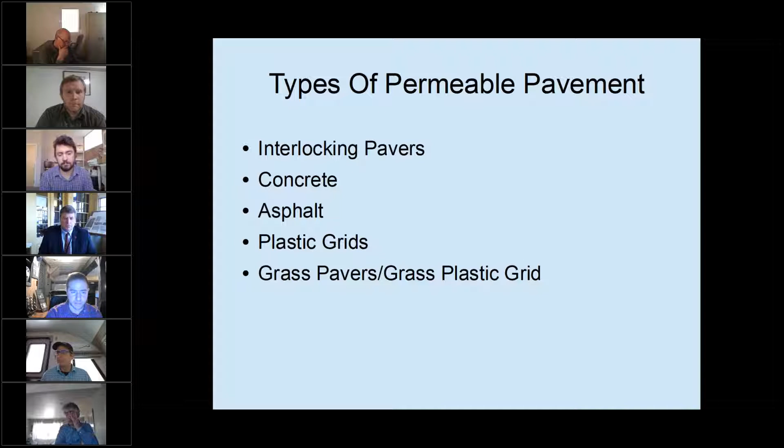So the types of permeable pavement, you're going to see interlocking pavers, concrete, which is porous, same thing with asphalt, which is porous, plastic grids, and the grass pavers/grass plastic grid. The permeable interlocking pavers should be vacuum swept at least twice a year, like I had said, usually 3 to 4 times a year, but some will do more. Leaf and organic litter should be removed before decomposition occurs. Power blowing should be completed on an as-needed basis.

Some people blow these things down weekly; they put it into weekly maintenance, whereas the larger maintenance 2-3 times a year is vacuuming it. In between, we hit it with a blower. And when we do these in-between maintenances, they take off some of the stress of doing these big maintenances that are needed. In between storms, we could get a thunderstorm that brings down a lot of debris, we have trash, we have litter, and that stuff being cleaned up once a week saves you from clogging the system.

Rice stone in the joint should also be replenished. This says on a year-end basis, and this is what's listed by Unilock and Pavestone, but it's usually done when you actually do some of the bigger maintenances and you actually blow out. We like to keep it replenished. Some of the common maintenance issues you see with permeable pavers: winter snow removal is a big issue. Using fine sands and chemicals, you have to remember that fine sands are going to sit in a sediment, and any chemicals you use are going to go into the groundwater. So that's something to think about when we're doing winter maintenance.

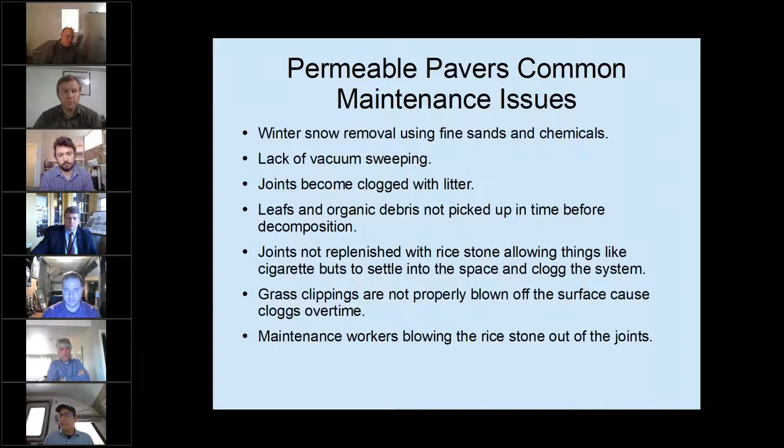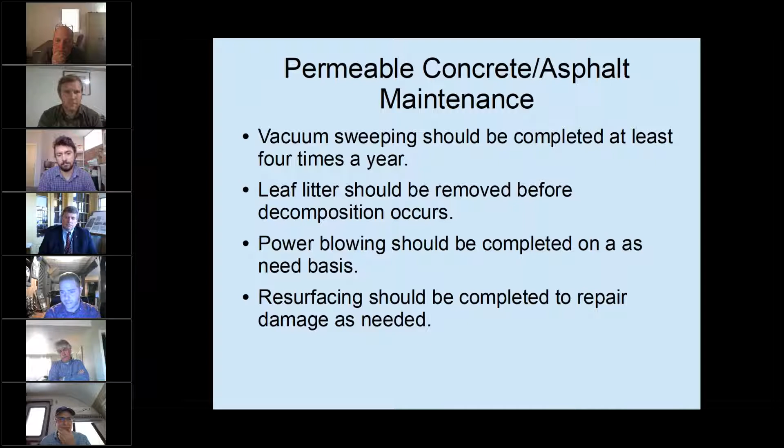So the concrete and asphalt have kind of the same issues. Vacuum sweeping should be done at least 3 to 4 times a year, sometimes more often, since they have smaller holes and are very porous. Again, a lot of people do it after every snowstorm, after every big storm. Leaf litter should be removed the same way. Power blowing should be completed on an as-needed basis. And when they're damaged, they need to be resurfaced. That can happen from plowing, vehicular damage and large equipment damage.

Some of the common issues that we see, again, are with winter snow. There's a big parking lot down at URI, and underneath is a giant reservoir. They can't use salt there because the salt will turn the reservoir into salt water, which is then pumped into other things. So they don't put any salt on it. What do they do? They put up signage: be careful, this is going to be an untreated area during snow. You see it a lot in parking lots now, signage warning people that we may not be using salt or heavy sands, we're just plowing, be careful.

And the same things happen with the lack of vacuum sweeping. Something like this needs a very powerful vacuum, one of those big trucks to really suck the sediment and debris out. You're dealing with very fine debris that's clogging the porous concrete and asphalt. As you can see, a couple of examples there. The example on the right is from the UNH website, where a leaf is frozen in the ground, and that area is currently not doing anything. That's not permanent; when it thaws, the leaf gets sucked up, but during that winter month, that area may not be working as well.

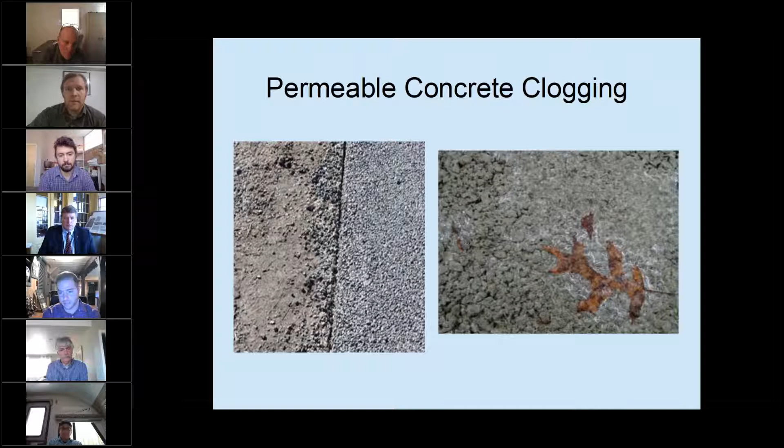And in the left photo, you can see the right side has no sediment, and the left side is completely sediment from a construction job taking place next to the area. So that's something to be mindful of during the construction season; if there's a nearby job going on, these should be swept at the end of each day rather than just 3 to 4 times a year.

And these are the grid permeable paving that we've been seeing. Sometimes these have grass, sometimes they don't. This is something newer that they say is plow safe. You can see the white markers; you can actually make parking lots out of it. These are nice because you can do low power blowdowns, low power washing, and just resurfacing the media. These clog less. They have fewer issues.

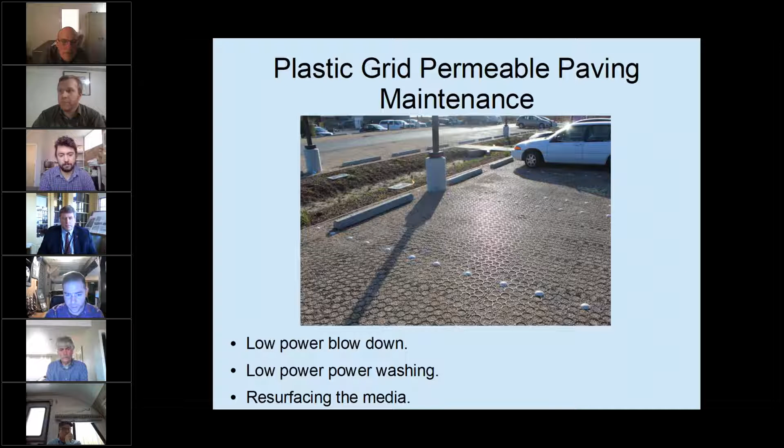The plastic grid is holding up. You can see how much space and how much water they can take in without clogging. You could dump a truckload of cigarette butts on this, and they can easily be blown out rather than even swept. A blower will simply blow everything out because the joints are so large.

With some of these issues, some of the common things we see is vacuum sweeping the system. Some places, we've heard stories, we've never seen it, but they'll actually go in there with a big vacuum sweeping truck and just suck up the debris in something like this. Whereas something like this, you don't want to use big systems.

Using too much force while blowing down the system, using too much PSI while power washing. Basically, if you go too powerful at these systems, they're the opposite of the other three. You'll actually blow the media around. You'll actually do damage to the system. So a system like this, and again, if there's no training on this, no one will know. So it'll turn into a giant issue.

I think I lost my system there, but I was actually at the last slide there.

So that system could actually end up getting hurt by putting too much power into it, bringing in too much power and equipment. So depending on what system or what permeable pavement you have, they all require different tools and different systems. And the best thing when it comes time to do maintenance is being trained. How do we do it? How do we do it properly? That'll keep the system running for the longest period of time.

Okay, thanks, Steve. Appreciate it. I know Steve's been battling an illness all week, so thanks a lot for pushing through that.

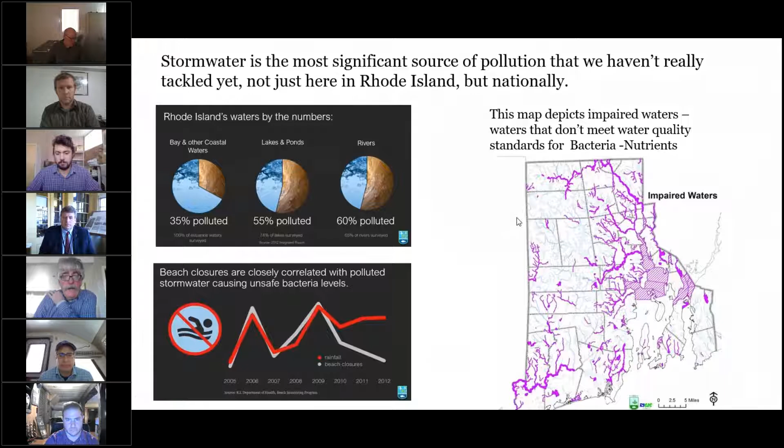We assess them on a regular basis. And the data early on showed that we could draw a direct correlation to stormwater events, especially when you look into smaller watersheds. And one of the best examples is, you know, bacteria and beach closure events. DEM has made a significant investment in green infrastructure, promoting it. I'll show you some of those examples later on.

We've been working closely with the Rhode Island Infrastructure Bank and other grant and bond funds. So when you see the opportunity to vote for a green bond fund that includes stormwater improvements, tell all your friends and family to go out and vote yes. And I think there will be another big one coming soon. There's been a lot of strategic investments by municipalities. You look, some of the examples here, Roger Williams Park, down in Newport, I could say South Kingstown, Middletown, East Greenwich, Woonsocket. I mean, it's across the board.

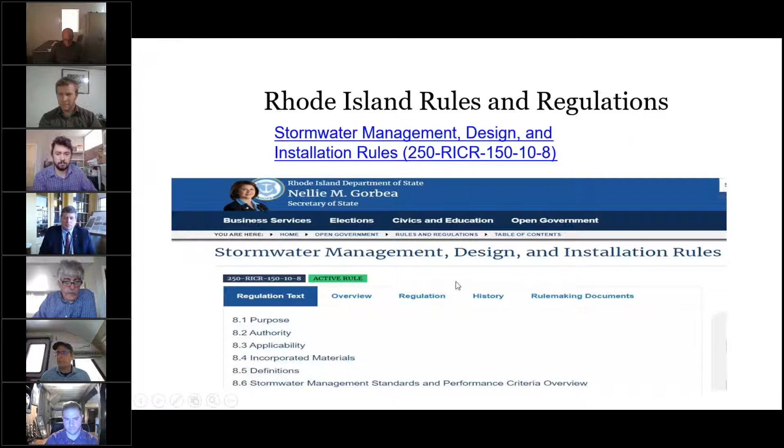I wanted to just give you a quick tour of some of the rules and regulations so you know where to find them. I'm not going to go through them. Just going to quickly click through these screens. You can find our rules for stormwater management design and installation on the Secretary of State's website. And I'll show you some links, but just to know that there are some rules about how systems are supposed to be designed. That includes a standard for maintenance and operation and having a plan for each BMP, as we talked about. Those maintenance plans have to have certain elements to it. Most importantly, a diagram of the BMPs and some assurance that they'll be maintained.

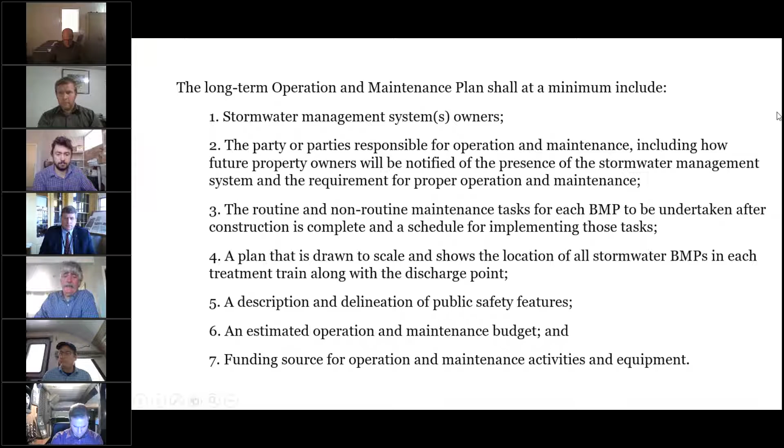And I also wanted to make a point just to let you know that Rhode Island does now have a permit search, or permits are now posted online, so the approved plans can be found online, and I'll show you where that is on our website later.

But back in 2010, we developed a new stormwater design manual that emphasized the focus on water quality and recharge in addition to the type of stormwater management we did in the past, which was maybe at best managing conveyances and large storms with detention ponds. But this was a significant step forward for the state of Rhode Island. It was amended in 2015 for some small amendments, but now being 10 years old is ready for a revision that addresses some of the things that we're talking about today.

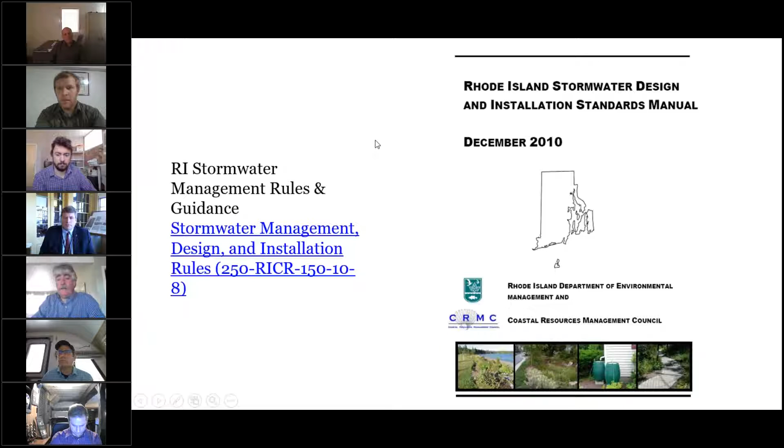You can find that. Visit our website. It's very simple, dem.ri.gov/stormwater construction. That's one way to find it, and it should be an easy way to remember. You click on that and you can find our resources page. So I just wanted to show you that that exists, and let you know that that guidance manual that I'm going to be talking about is also on that page. If you look on your right hand side, you can see we have additional resources links, and then we have resources for designers.

That's something that you should be able to find. And in that guidance manual, we have design guidance for each of our structural BMPs in Chapter 5. That also includes functions for operation and maintenance, so considerations for that in the design.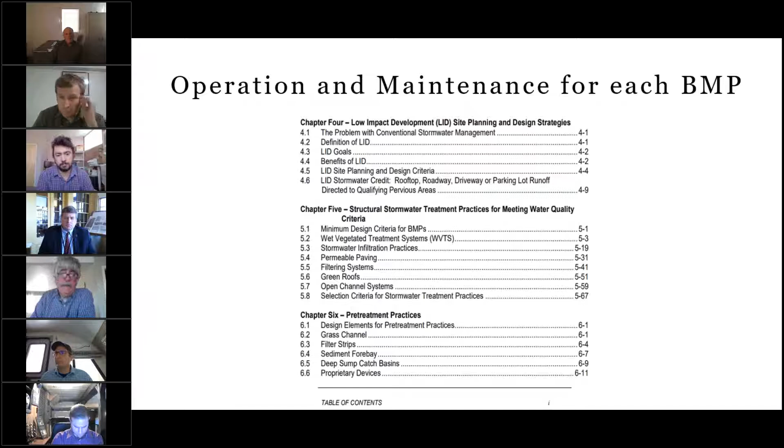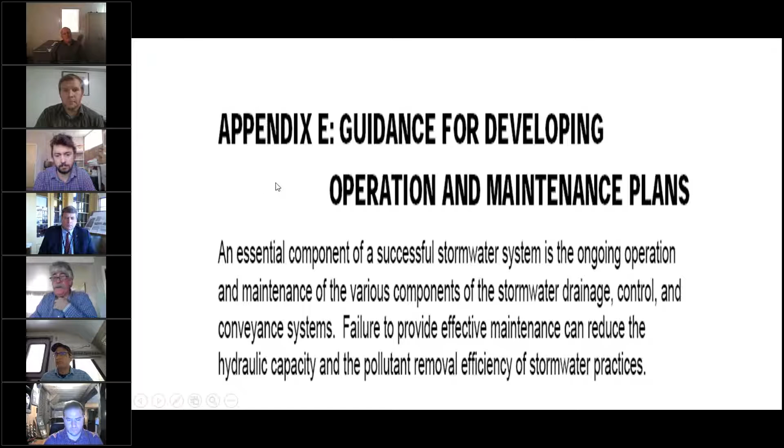But if you look a little bit deeper in Appendix E, we have guidance for developing those O&M manuals. And we have checklists, like Brian has and showed you a brief glimpse of, and you'll see maybe later. Those are templates. They're meant to be adapted for the BMP, as long as the main elements are there: basically that you're doing a routine inspection, that there's some routine maintenance, and that there's corrective action that happens after you do that inspection.

And I think we all acknowledge that, as we look at designs here at the state level, and we require O&M manuals to be done, just like anything else, it's essentially a draft when we see it at the design stage and when we approve it. Once the system is built, then I think that's when the O&M plan becomes real and can be amended or modified to fit the BMP and how it was installed.

But that's the point at which we'd really like to see that collaboration happen at the local level where, like Scott said, if somebody was able to talk to the designer during the design stage and while the city was reviewing it, or when the state was reviewing it, asking if the city was okay with the design, if somebody was able to point out to the designer that a tree overhung this area or that the system was in the wrong place, those would have been valuable comments and saved the city a lot of time, money, and heartache.

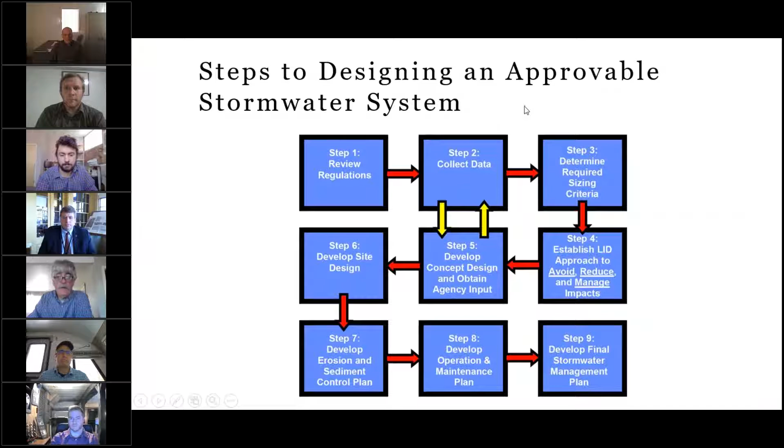So that's where you really have to emphasize: is there an opportunity to talk to the people in your municipality who do the reviews and approval of these technologies to get you into the discussion? Because we all have a role, and I think that's really important for us to realize. We have our designers, our owners, our maintenance people, our contractors, our permit reviewers, our municipal officials.

And my part, essentially, is trying to connect the lessons learned, the things that we're seeing from the contractors, from the maintenance crews, and feed it back to the design community and the municipal officials and the permit reviewers, and improving the outcomes. So that's why I'm so excited about hearing some of the things today, and that so many people signed up for this training, because there's a huge interest out there, and we need your feedback.

So as Brian mentioned, back in 2003, we came out with a new rule in Rhode Island that was in accordance with the Clean Water Act. EPA required the state to basically issue a set of rules to address municipal stormwater systems. Part of that requires that the MS4 submit annual reports to us and develop inspection schedules for long-term O&M.

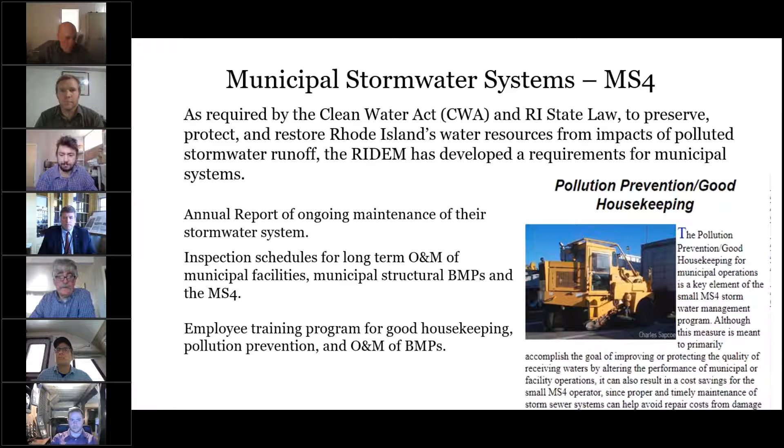And that's why you're seeing, as these programs mature, the city of Newport and Brian at the Roger Williams Park have developed these programs, and also this ability to provide employee training programs. This is the culmination where the Stormwater Innovation Center is a great platform to share this information and to provide training for your staff, yourself, professional development, and it's been a great opportunity.

The title of my presentation was Moving Forward, so I did want to give you that background, because I wanted you to know how important it is, what you do and what role you play as that field staff component, as that person responsible for maintaining the end product, in restoring our waters. And I can point to numerous examples where we do have results, and we do have really great success stories where water quality improvements have been realized through the implementation of green infrastructure, and it's truly exciting to see.

I wanted to give you those kudos and basically say that we're working hard moving forward on particularly addressing some of these design issues that the people who maintain these BMPs are seeing and recommending, and how do we get that back into the loop?

Well, the Woonasquatucket River Council and their river rangers are maintaining BMPs for the Rhode Island Department of Transportation, and it's largely due to a consent decree that we negotiated between EPA, DEM, and the DOT to go out and do some of these restoration activities and to incorporate these BMPs into their projects going forward.

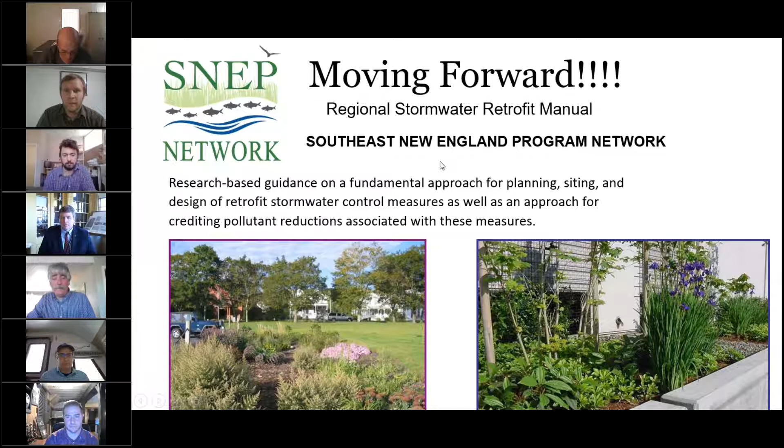We would also love to take an opportunity to update our manual now that we've worked on a manual with DOT. We worked on this retrofit manual and start feeding back some very important updates that we've learned are necessary over the last 10 years of using this manual. I'll give you one teaser.

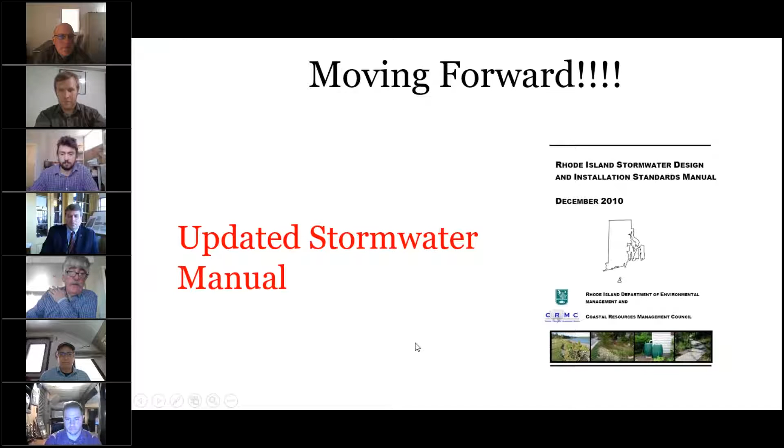We've been working and glad to hear that Jamie and UNH just released a new specification for bioretention soils that will allow us to update our manual and get better designs, so that, you know, you may not see it necessarily from the surface of the ground, but what you won't see is failures. And I think that's how the end result will be: better designs, improvements that we can make along the way. It's due for an update, and if budget and time allows, we'd like to start working on that as we learn in these other processes.

I also want to let you know that the Office of Water Resources is in the process of drafting a new MS4 permit. The last one was issued quite a long time ago. But since then, EPA Region 1 has reissued the MS4 general permits for Massachusetts and New Hampshire. And Rhode Island is going to be starting the public workshops on that beginning this summer. So I encourage you to participate in what you've heard today and feed that information back to the people that you work with and participate in those workshops.

The other thing that I wanted to mention is very much tied to the reissuance of the MS4 general permit, and definitely is a good nexus to what Brian wanted to talk about on tracking and how we record this information. The permit requires annual reporting. The municipalities have to report on how they're doing, but now it becomes more important because basically we're looking at restoration plans and what needs to be done in a particular watershed. They're called stormwater control plans, and they're meant to identify what the impairment is, what's contributing to the pollution, and what has to be done to get it back to standards. And the municipalities and the people on this panel are probably very familiar with that.

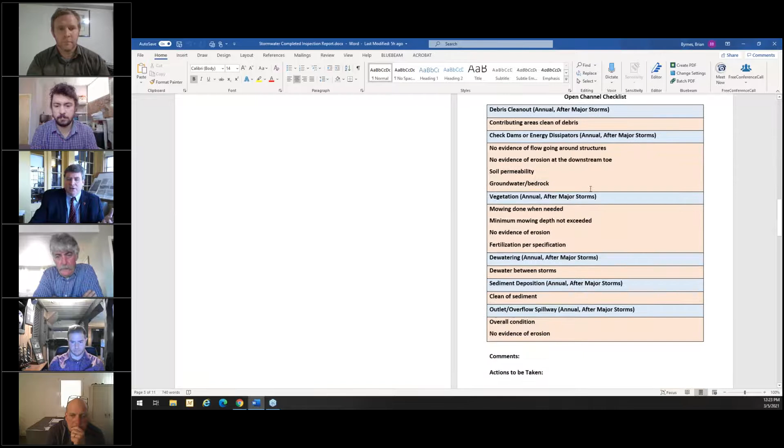So these are the answers to the questions, because it doesn't say satisfactory, because these are ones that the inspector chose: contributing areas, clean of debris, dumping of yard waste, there was dumping, litter and branches have to be removed. So these were actions that were the result of their evaluation. And it's in the different areas. I'm sorry I didn't show you that.

So this is the sediment forebay checklist. And they move forward. It's the open channel checklist. So it indicates where this work needs to take place. Sand and organic filter checklist. And bioretention area checklist. So we've identified all these things. Some of the images I don't think are coming through on this because it's a desktop, but these big blank areas are all the pictures that Leanne took.

So they not only have it, and again, they're pulling it up on this iPad. In addition to this checklist, they also have a database of all sorts of things like what I showed in my presentation. They show a more detailed picture of that element, exactly where everything is. If they're confused about what it is, it's going to show you on that.

We also use it for our snow removal crews. They'll pull up a site and it'll show exactly what sidewalks need to be shoveled. So all of this information is available to them in their iPad.

We were having them do it with hard copies. It ends up on the floor of the truck. It blows out the window of the truck. You wrote your grocery store list on it. So these are real time submitted to directors, and they get reports annually through another software that we have that says, this is the amount of time we went to Cladrastis. This is the amount of work that it took.

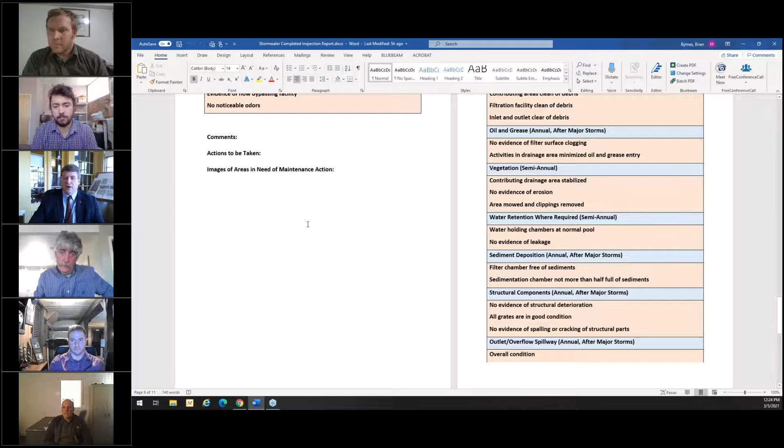And then we build our year-to-year maintenance on that information. So while these are automatically generated, there is another step for directors to compile this information manually. We're looking at another system that will do that for us, to take that out of the mix. But for the most part, this has worked extremely well for us. And it's called Survey 123, and then the information goes into a software called Green Cities.

We are looking at and moving to a software called Asset Essentials. And the difference between Green Cities and Asset Essentials is you can build a year schedule on Asset Essentials, where Green Cities we couldn't. And reoccurring things, like we even track which trash cans we empty and what their status is. So we have a larger park and there's 20 trash cans in it. Trash can A1 is overflowing all the time. We indicate that. A25 is empty all the time.

We help to make our workers smarter, not work harder. And so they go to A24 once every 10 days. They go to A1 every day. So we're going to do that with stormwater too. There are some sites, because of their location, that don't require as much maintenance. We were going to go there minimum 4 times a year, but with those after-storm records, we'll know that, hey, you guys know you got to get out there.

You know, it's always clogged. You got to get out there before the storm. They may not have time to do all of them. They know the hot ones they got to get to. So it's worked out very effectively for us, and it allows us to do the reporting to DEM. DPW is actually our parent organization for that reporting to DEM. So we provide this information to DPW. DPW in turn sends it to DEM. So we are fulfilling our MS4 permit requirement.